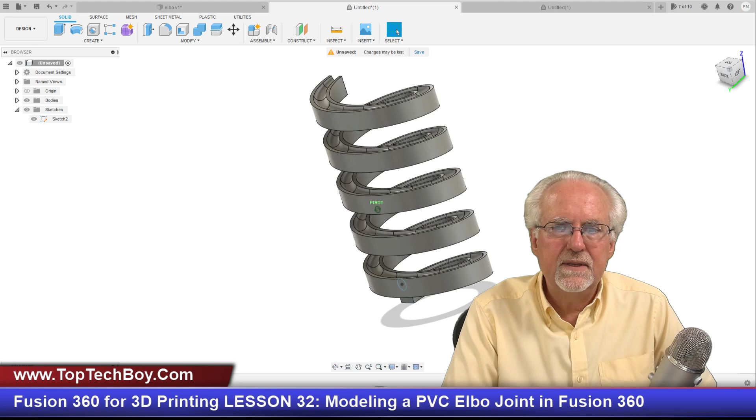So I'm not going to start here. I'm going to start with a new design. So I will come over and say new design, and I will kill this design that I did last week. If you guys didn't see this lesson, make sure to go back and watch last week's lesson. I think that was cool. I do really want to print that, but we're going to kill it for now.

We're going to come in here, and now the other part of the homework assignment: that elbow needs to be parameterized so that you can create any elbow that you want once you get the model in there, okay?

So since it is parameterized, we are going to start by creating our parameters. Well, if I look at this, I'm going to need an overall outside diameter, and I am going to need an overall inside diameter. So the outside diameter and the inside diameter are the ones that are not associated with these thin regions on the end. It's just the total outside diameter and the total inside diameter.

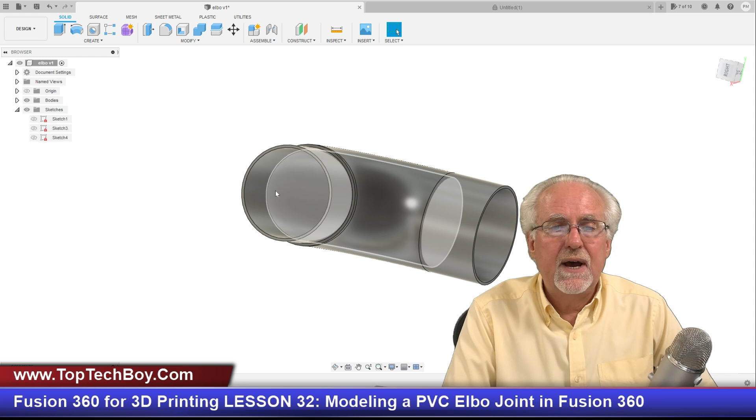Okay, now what else do I have? Well, I have a wall thickness. I have a thickness of this thing. And then what else I have is some overlap region: however long this extension is, this little inset needs to be the same amount, so I'm going to call that overlap. And then I need to have some diameter, or radius I guess I should be saying, of this little extension piece, and then I need to have a radius of this piece.

So you see, this radius is different than the overall inside radius. So I need the radius here, I need the radius here, I need the radius here, I need the overall inside radius, I need the overlap, and I need the thickness. And then I think the one other thing I need is how sharp do I want this curve. So I need kind of like a radius of curvature for going around this corner. I hope that makes sense.

So we're going to come over here now, and we're going to come under modify, and we are going to create our parameters. So what is the first parameter that I am going to want? The first parameter is the outside radius. So we're just going to call that OR, and I'm going to set that to about 38 millimeters. And then I am going to have an inside radius, and I am going to set that to, no, I need to have a thickness. So after outside radius, I'm going to set the thickness to be 4 millimeters.

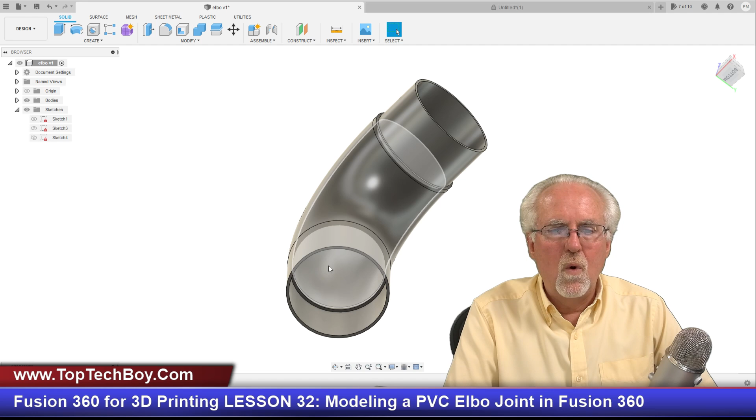All right. And so that is going to be the wall thickness in this region that hasn't necked down on the outside and hasn't necked down on the inside, but it's that full wall thickness in this region that's going around the corner. I hope that makes sense. So we come back over here, and I lost my parameter table, so I'll call it back up here. Change parameters, there it is.

So I've created outside radius, OR, thickness. Now I need IR, or inside radius. And again, that's in the full thick part. That's not in the part that's been trimmed down on the outside or trimmed down on the inside. Well, if I have defined the outside radius and I have defined the thickness, I can't just put in a number here, because I would be over constraining it. The inside radius is what? It is the outside radius minus the thickness, okay?

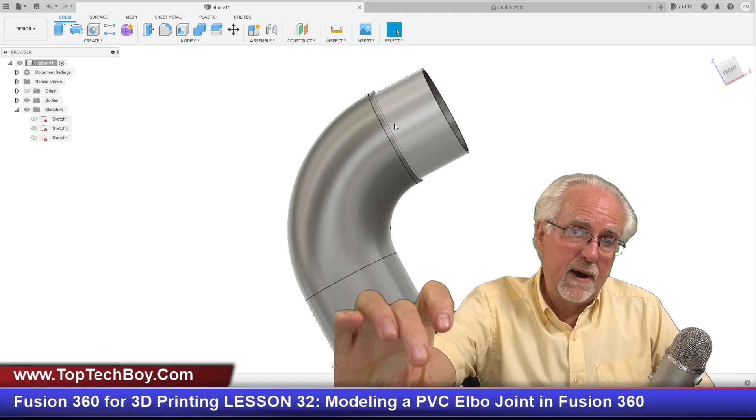Like that. Now, you wouldn't always want this to just be a simple corner. Maybe this would want to be extended out, or this would want to be extended out. Not the overlap, just you might want to come out with some segment of pipe that might be longer. You might want to go more than just going around the corner. And so for that, what I would do is get my parameter table back up here.

Okay, so I'm going to call it a span height, and that's like how tall it is from the bottom up to the corner, span height. And I think that I will make that about 60 millimeters. Okay, and then I am also going to do a span L for span length, and then I will make that 60 millimeters as well. Okay, that looks pretty good.

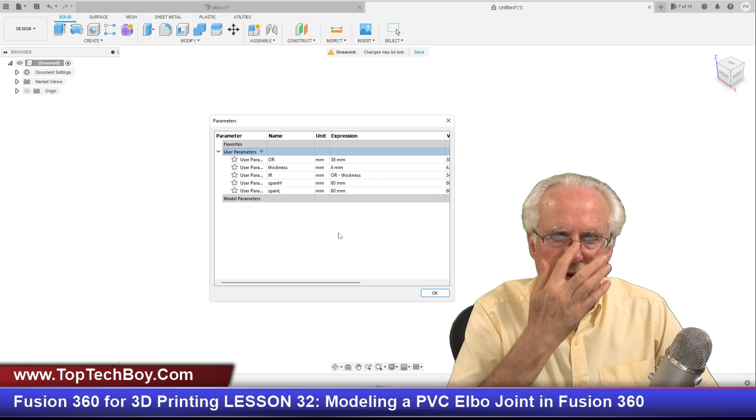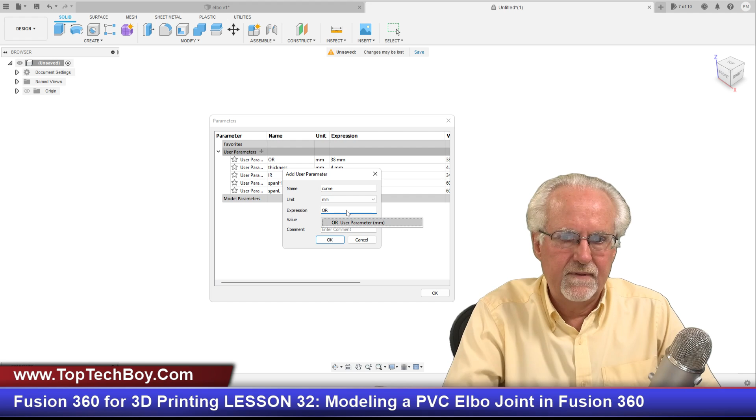Now what I need to do is come in and give it that curvature, and like, what is the radius of curvature? And I think I'm just going to make that whatever the outside radius was, so it goes around the corner just as sharp as if you would be wrapping it around the thing itself, if that makes sense. But I think that would work pretty well.

Now what I've got to do is come in and think about the radiuses of this region and this region. And so let's start with the, I'm going to have to think, the inside lip. You see, this is the inside lip and this is the outside lip.

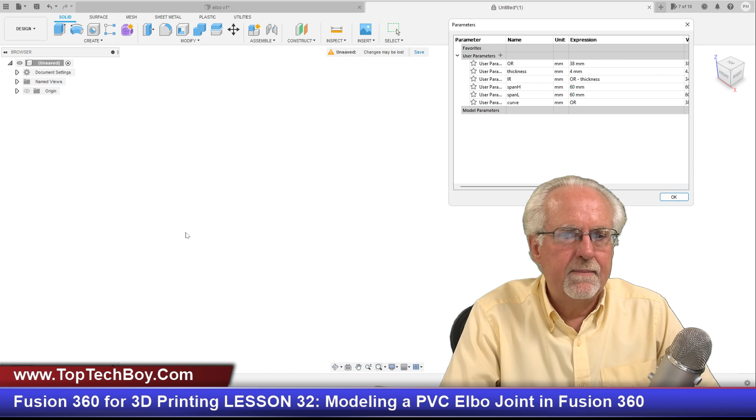The outside lip fits over the inside lip. The inside lip slips into the outside lip. And so we need to go in and put some parameters in for that. So I'll come over here and modify my parameters, and I'm going to add a new parameter, and that is going to be the OLR, the outside lip radius.

What we're going to be putting in is the inner radius of the outside lip. Well, what would the inner radius of the outside lip be? It would be the overall outside radius, minus the thickness. No, it would be 0.5 times the thickness. Okay, so I'm coming in by 0.5 times the thickness. So what does that mean?

Okay, here. That means that this thickness is going to be half of what the overall wall thickness is. And over here, this is going to be half of the overall wall thickness as well. And we'll do that in two different steps. But now this is really important. If I came in on the outside lip by half the thickness, and on the inside lip I made it half the thickness, that is leaving no tolerance at all. That would be kind of like a jam fit.

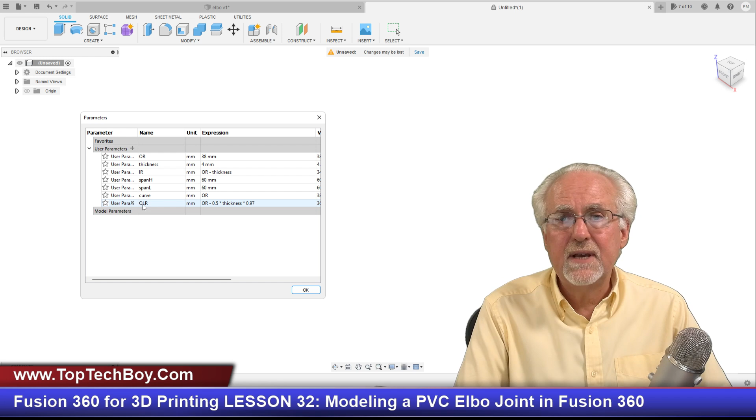Thickness times 0.97. Okay, so that is the outside lip radius. What is the outside lip? This is the outside lip, and it is the radius out to here. Now I will come back over here, and this time I need to add another parameter, and that parameter is going to be the inside lip, IL radius.

And what is that going to be? It's going to be very similar to the other one, but it is going to be the overall inside radius, plus 0.5 times the thickness times 0.97. So for the inside lip radius, I start with the inside radius and add not quite half the thickness, a little bit less. So I've got 3% extra space on one lip, 3% extra space on the other lip. Hopefully with those two combined, they should work.

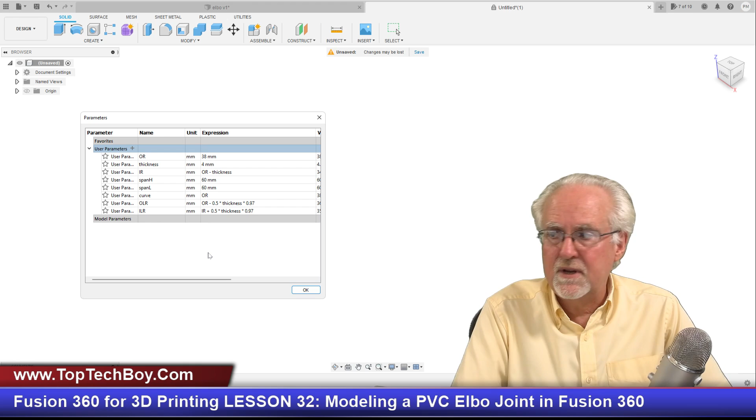All right, so I think I pretty much have my parameters done now, and most of the work is creating a good set of parameters. So now I will come in and create a sketch. I'm going to sketch in the XY plane, and I'm going to start by drawing a big circle that goes out to outside radius like that, and I'm going to say outside radius, and let's get that out of the way.

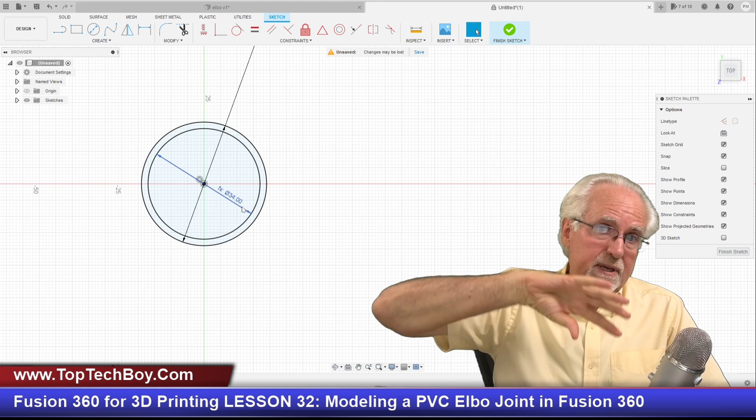Okay, now I'm just going to flat out do an inside radius. I'm going to come here, and this is going to be the full inside radius. Enter, enter. If I didn't have to worry about the lips, I could just extrude this thing around and we would be done. But this one is going to be the one that has the outside lip. I'm going to put the outside lip down because I think it'll be a little bit easier to print there.

So here now I need to do the outside lip radius. There is a magic third circle, and that is going to define the outside lip radius, because that is the outside lip. All right, does that look good? Enter. And let's move these things out of the way, because I don't like them messing up my drawing. Let's get that like that, keep things neat.

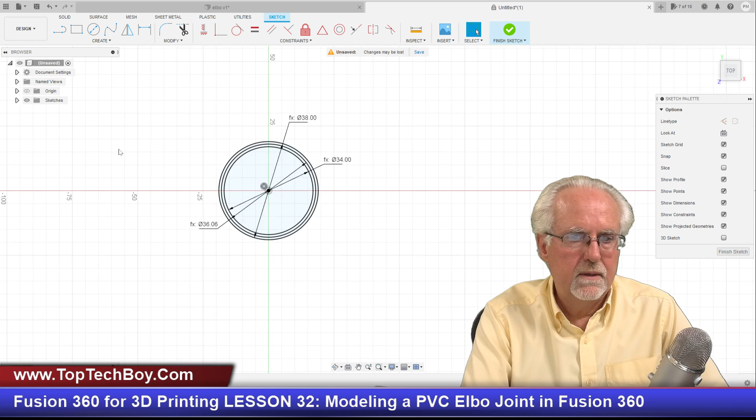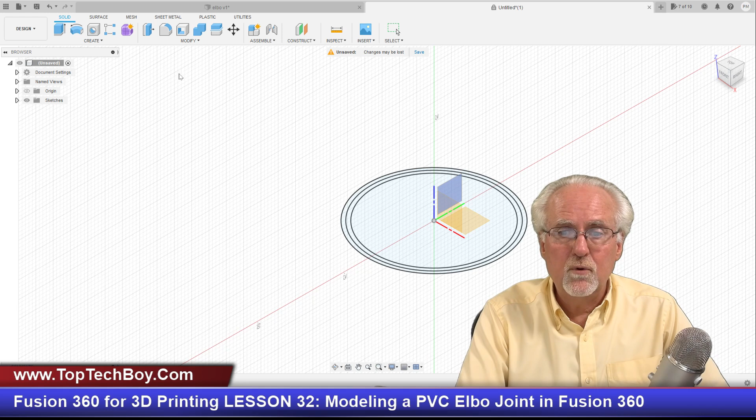Okay, that looks good. Now, I think I'm ready to go ahead and finish that sketch. So I'm going to finish it. I'm going to come here like this. Now what I need to do is I need to create the path. So I'm going to create another sketch. This one needs to be orthogonal to this. So again, I'm going to use the red-blue plane, which is the XZ plane. And now I'm going to draw the path that I will extrude that along.

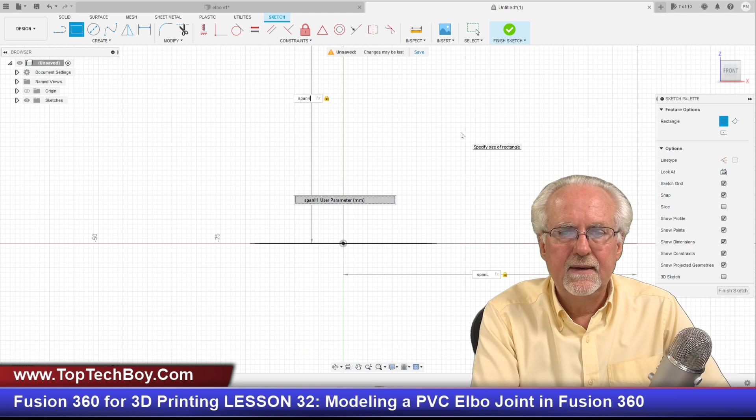So I think the best way to do it, I'm just going to start with a rectangle, and that rectangle is going to be span L in this direction. That's how far it goes this way. And then how far up does it go? Span height, like that. And then enter, enter. All right, so I'm beginning to get my path put together, but you wouldn't want to come up here and try to do a sharp 90-degree curve. That wouldn't work very well. We want to gently go around that corner.

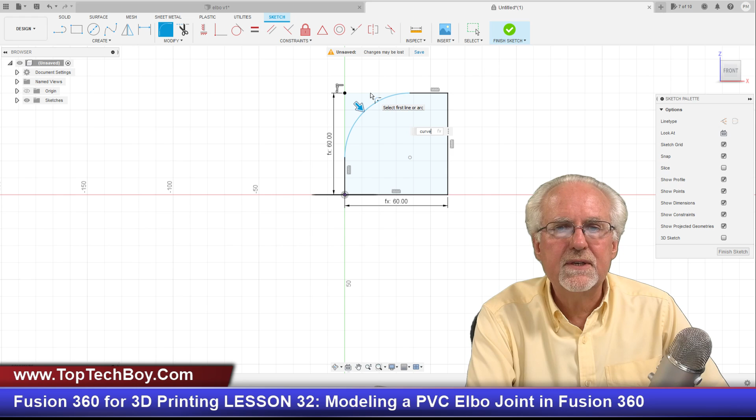So who is our friend? Mr. Fillet is our friend, and I want to fillet this to this. Just whatever it pops up. For the radius, no. What did we say this was going to be? This was going to be curve. It was that parameter. And then you can see when I do that, I've created a much more gentle path for this circle to flow around to create a nice elbow.

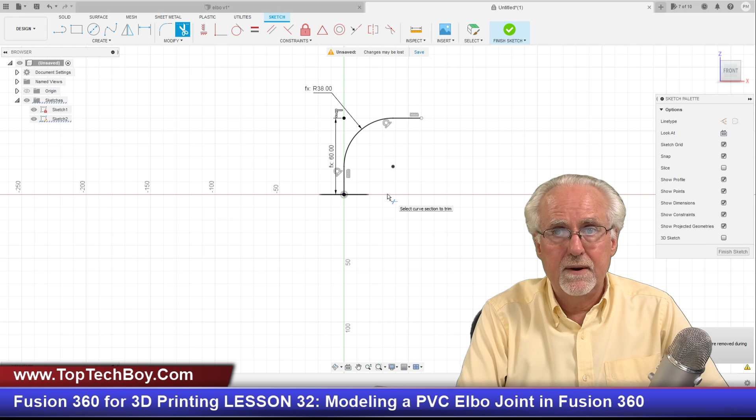Okay, now what I need to do is I need to trim this thing up. And so I'm going to get my trim tool. I'm going to take that off, and I'm going to take that off. And then one of the problems that you can see is that I lost that dimension. And so because I lost that dimension, I couldn't change this length along here. I couldn't change span length. When I clipped this bottom segment, I think the dimension was tied to the bottom segment. So when I lost the bottom segment, I lost that constraint.

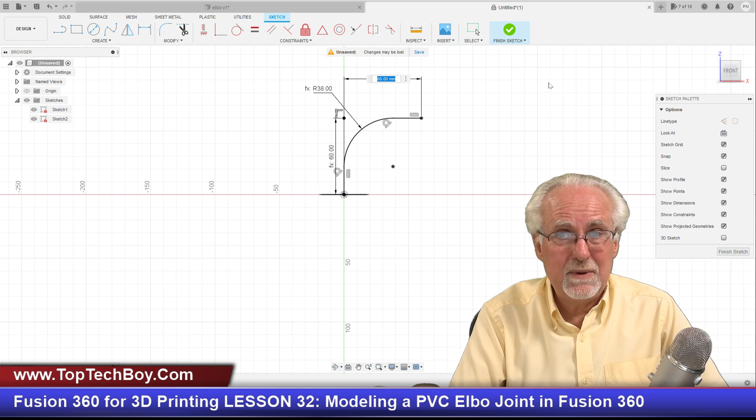So I'm just going to go in and put a dimension. So I'm going to put D. Put a dimension from this point over to this point. And the good news is it put in 60, which is what we set span length to, but I don't want it to be 60, I want it to be what? Span L, like that. Okay, now it's 60, but it's not the number 60, it's the parameter for span L, and the number that goes with that parameter is 60. And look at that, boom, over here we are fully constrained.

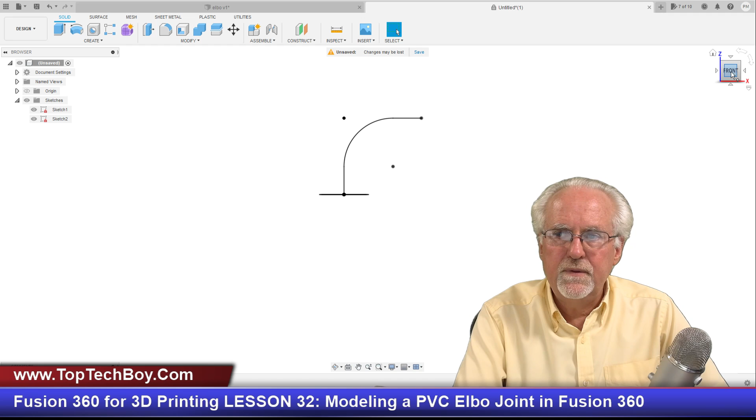So guys, the moment of truth is coming here. So we're going to come here, and the first thing that I'm going to do is create the whole body. And so when I create my sweep, I'm going to extrude everything. Okay, so I'm going to get this, and I'm going to get this. I'll come back and I'll cut those lips because I've got the guideline to cut the lip, but I'm just going to go all the way around. And then what path? That is my path. And then I don't have a guide surface.

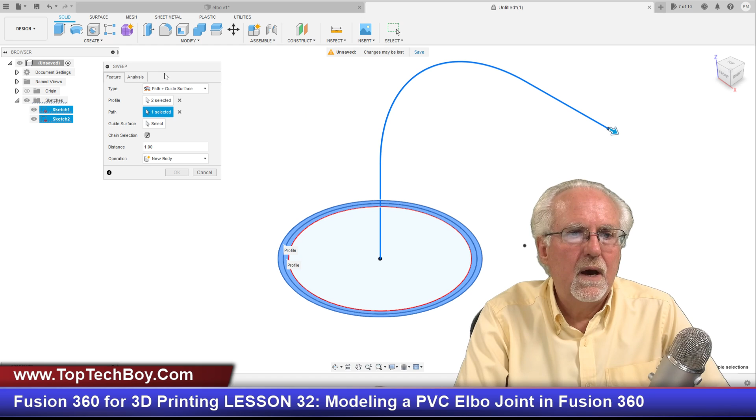And why is this thing not happy? Oh, I don't want path with guide surface here. That's what it was set to last time. I want single path, and boom. So you see, I've got an elbow. It looks a lot like this elbow. It is very nice, very good. I'm very happy. But what do I have to do now? I need to go in and put these cuts. Okay, and so I'm going to come down here. I'm going to turn that first sketch on, and this one is going to be the outside lip.

So if this one is going to be the segment with the outside lip, I need to cut out what? I need to cut out the inside. So I'm going to do an extrude, and I'm going to extrude the inside, and this is going to be a cut, right? So I'm going to come down and say cut, and then how far do I want to go? I want to go by the overlap.

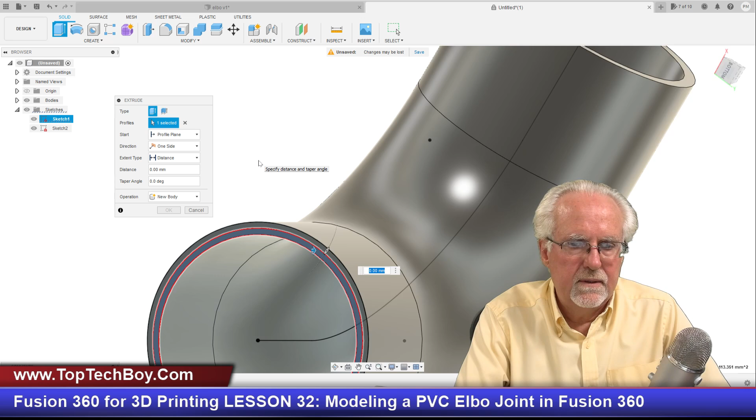Did I put that in? No, I didn't put that in. Let's see if I can add it here. Change parameters. I forgot to put in overlap. Overlap. And I'm going to put in an overlap of 20 millimeters. Okay. And so now if I come and select this, I'm going to say extrude that. And I want it to be a cut, and I want it to go by overlap like that, and then I'm going to say okay, and boom, look at that.

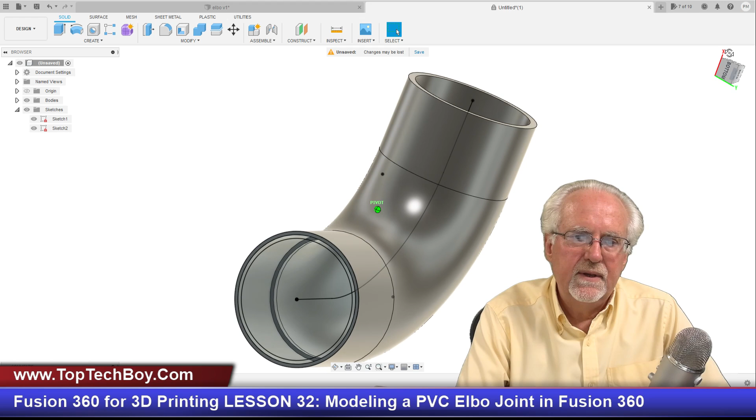Okay, look at that. So I have my outside lip, the inside part was cut, and this wall thickness here is a little less than half of the overall wall thickness. It's half of the overall wall thickness times 0.97, if that makes sense.

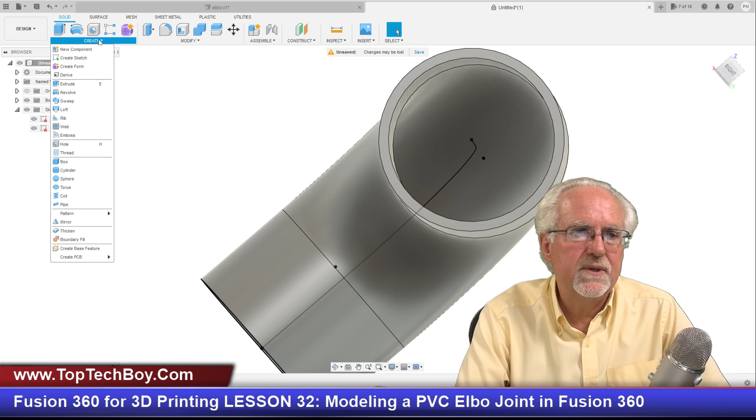Okay, that is really neat, but we still have to come up here and do this. And you see we don't have anything to work with here, so we need to make our circle. So what I've got to do is create a new sketch. I'm going to create it on this surface. Now I'm going to create a circle. I've got to make sure that I snap to that center point.

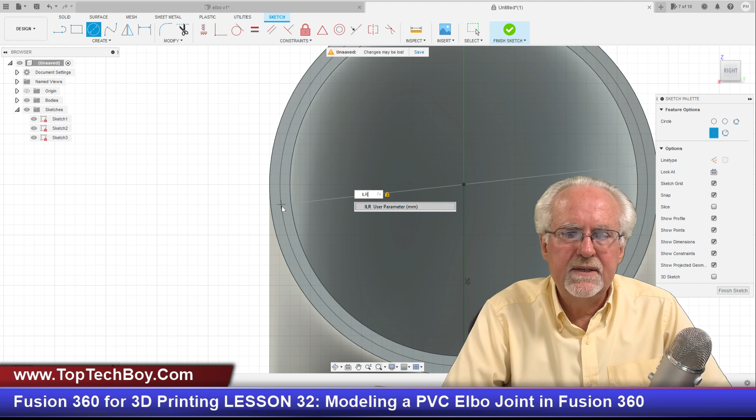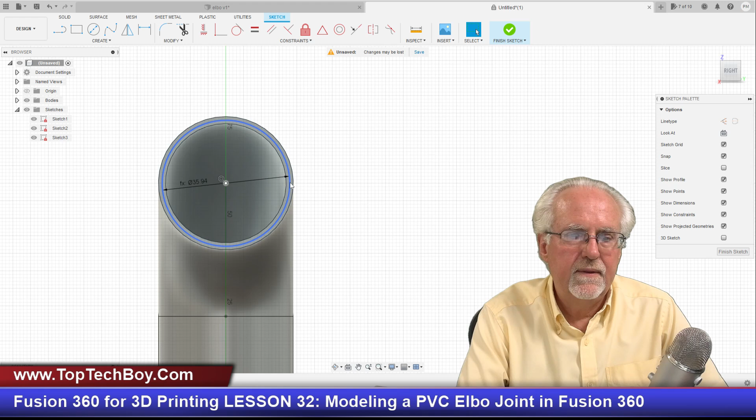Now I come out by what? What am I making here? Am I making the outside lip? No, I'm making the inside lip. So this is the ILR, for the inside lip radius. And then I click enter, and enter, and there it is. And now you have to ask yourself, what am I going to cut this time? This time I'm going to cut the outside, and that will leave me with the inside.

And so I will come here. I need to finish my sketch. I'm going to come here, and I am going to extrude. And then how far am I going to extrude? I'm going to extrude by overlap again. And this time it is going to be a cut again. And it's not happy this time. Why? It's trying to come out instead of go in.

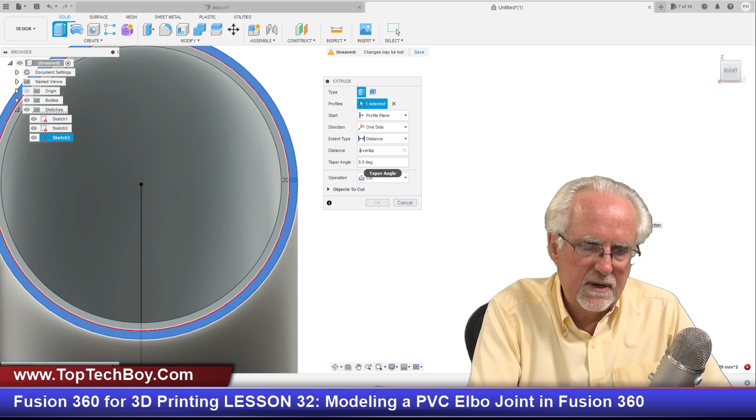And you never really know which direction it's going to go, but I can just come in and say go the minus of that. And then let's see, yeah, it likes that. And okay, boom. Look at that. Now I have got my elbow defined in a parameterized model.

So let's come in and play with this. Let's say modify our parameters. And in the overlap, what if we made the overlap 5 instead of 20? You see, now I've got just a little bit. That would be freakishly small. What if we did 10? Okay, we could do 15 like that. That looks pretty good. 15 looks pretty good.

Also, remember, we could expand that out. And so the length, instead of 60 millimeters, what if we made it 120 like that? And then we still have the lip. That lip would still fit here. And just remember, we do have that cutout spot in there for things to plug into.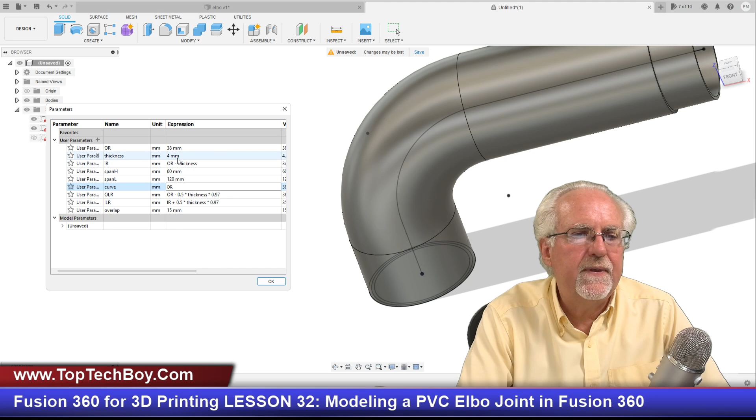We could also make it a tighter corner by changing the curvature. No, the curvature sticks with the outside radius. That kind of makes sense. Let's see what else we could play with here. Let's play with the thickness. Instead of a thickness of 4, what if we made the thickness 15?

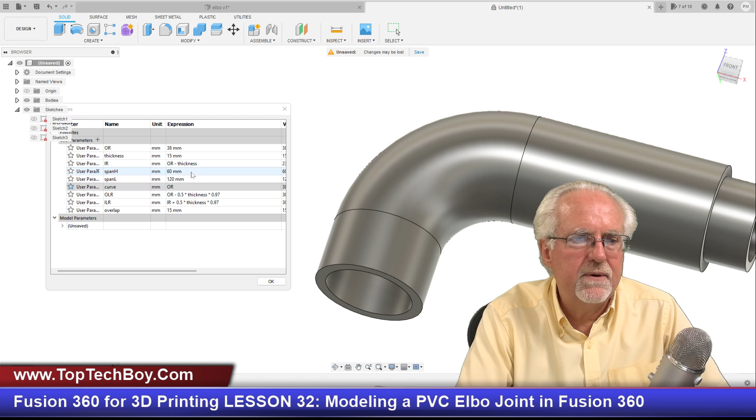And then you can see we got a heavy duty pipe. I think it would be helpful to turn the sketches off. Still, these things would plug into each other. So you see, I'm doing a lot of monkeying around with these parameters and changing my design.

But yet this thing would continue to work. So you see, you've got a very useful model here.

What I would like to do is make parameterized models for other things like a straight segment, a T segment, and maybe a Y where you come in and Y out from 1 to 2, and then just be able to go in and design an arbitrary piping system using these models that I have in Fusion 360 and then printing them. And so how cool is that?

Guys, I hope you're having fun with this.

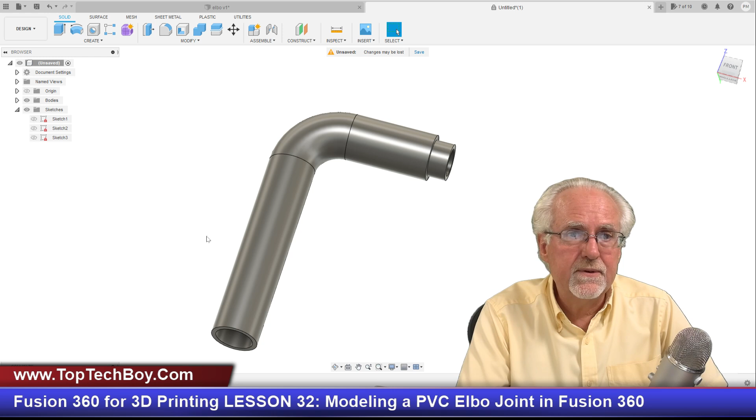Now the real question is, is this thing going to print? And why did I have you print that? Because if you make this wall thickness 4 millimeters, so let's go back and do that again. Let's come back here and say change parameters, and let's make the wall thickness... where is that wall thickness? That was 4, like that. And then I'm also going to change these back to what I had them, 60, and this was 60 like that. I think that's pretty close to what our original model was.

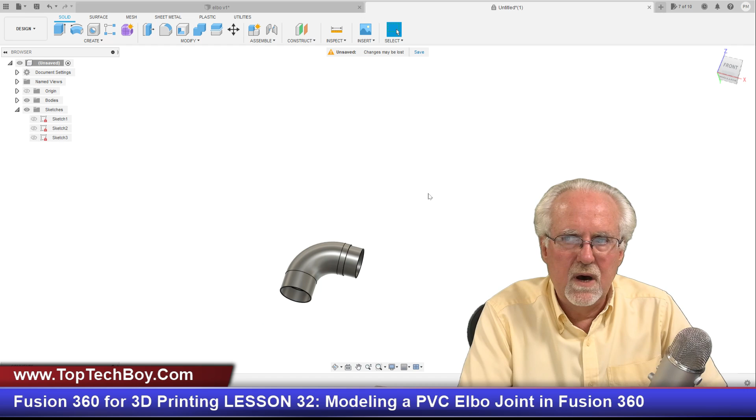Now, when we print this thing, what I want you to see is that this ring sitting on the build plate is just 2 millimeters thick. That is a real challenge to print because it's a very small area of adhesion. If things aren't perfect, this is going to fail and pop off before it finishes printing. But remember, a couple of lessons ago, I told you my techniques for getting perfect prints every time, where my prints, even challenging ones like this, will stick.

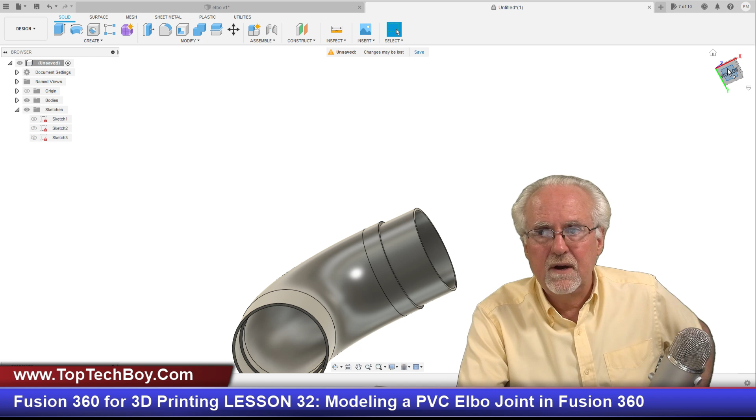Now you would have to decide for yourself how you would want to print this. You might print it laying down on its side, or like this with that one down, or like this with that one down. Or maybe you'd put it at a 45-degree angle and give it a little bit of a raft and a little bit of supports. There's all types of different things you could think of. I just wanted to try to print it without any supports and without any rafts.

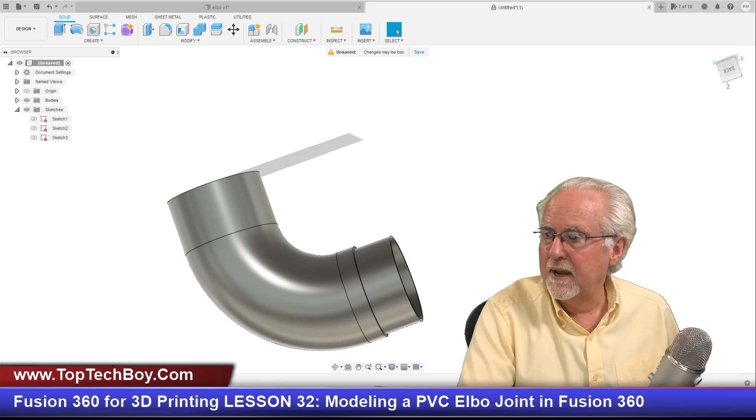And my print is underway here. Let's see if I can switch over to that camera. I probably am going to have to adjust it a little bit. Okay, you can kind of see that. Let's see if I can zoom in a little bit. A more professional operation would have had this set up ahead of time, but we go a little bit rinky-dink here sometimes. Okay, let's see if we can come in a little bit. That's not too bad.

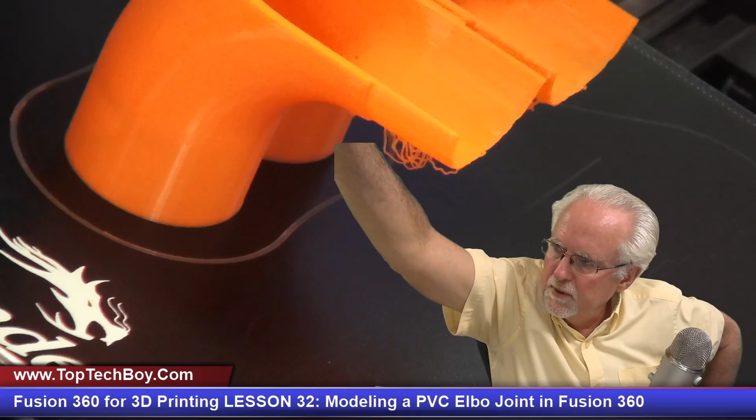Guys, this is pretty amazing. You can see that we are getting pretty far along on this print, and it is still adhered. Now, this was a very sharp corner, and when it was making the first few passes here, it's like it was trying to print over air. So you can see I've got a little bit of filament hanging down, but I think I could clean that up. What I'm really interested in is seeing, with those tolerances, if those things are going to plug into each other and make a proper joint.

So maybe I'll just pause here, and we'll come back when this thing finishes printing. So you guys just have a sip of coffee, and I will be right back.

Okay guys, we are getting really close to having a successful print, and what I am really delighted with is that these things have gone through the entire print and are still firmly affixed to the bed. And it is a 2mm ring. The wall thickness of the contact area with the build plate is 2mm, so that is absolutely amazing adhesion.

How did we get it? Because we always make sure that we have a fresh nozzle. We leveled the bed before we started, and then we did a bed mesh. Cleaning the bed, having a good nozzle, leveling the bed, using a bed mesh, and a few little things like that, and we can get perfect prints every time.